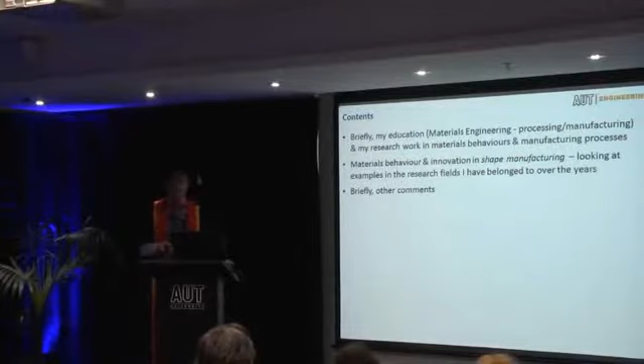This afternoon, I hope I can illustrate to you a little bit on materials behavior, its importance in manufacturing and innovations. I'll go through a little bit of my background in terms of education and research, and then go to the main topics, looking at some of the examples I've been part of over the years, and some brief comments.

But I think I should first define what we mean by innovation, at least this afternoon, since the word can mean a lot of things. It's pretty much process innovations, and it's a definition from a manual from OECD. It refers to implementation of a new or significantly improved production or delivery method. So that's what I mean by innovation this afternoon.

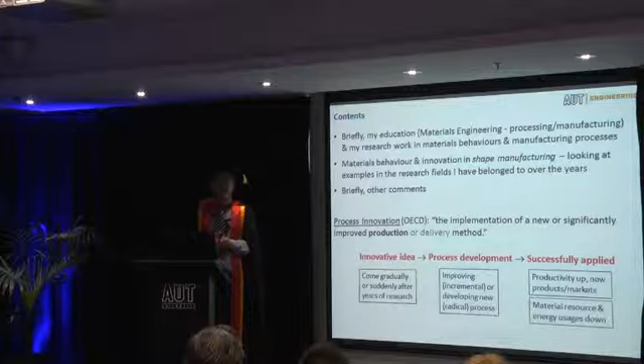Let me go a little bit into my own understanding with my background. The process of innovation is pretty much: you start with an innovative idea, a new idea. An idea can come suddenly or not suddenly, but in my case, that idea comes gradually, or suddenly after many years of research. So from the idea, you try to translate that into development of a process. That process development, according to the definition, can be incremental, but can also be radical process implementation.

Now, if it's successful, the innovation has to be successfully applied. To apply the process, of course, there are a few criteria, but today I won't be using data to describe that - it only infers productivity up, new markets, new products, but most importantly, of course, they have to result in reduced use of materials, resources, and energy, because that's quite important in terms of sustainable manufacturing and also sustainable development.

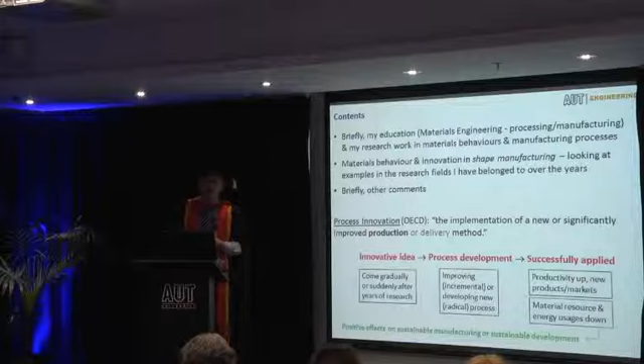All right, so I'll go back a little bit to my old days in university. I grew up in my teenage years in China, in a period that some of you may know, some may not know - it was kind of chaotic years.

And as a result of that chaos, two phenomena occurred. One is that some schools - high school, primary school - shortened, and afterwards a lot of young people were sent to the countryside, and I was one of those, sent to the countryside to be a farm laborer. But that was quite common.

With that, I'll mention a little bit - if some of you take notice of China, it's now in times of power transformation. The new group of people, for example, the 7 in the Standing Committee of the Politburo - 4 of those 7 actually got sent to the countryside in the old days. So it was quite common.

And no university - well, there was university, but you couldn't go through the normal entrance exam to get to university during those 10 years of turmoil, until 1977. The higher education entrance exams were reinstated, and we called it Gaokao. 5.7 million people took part.

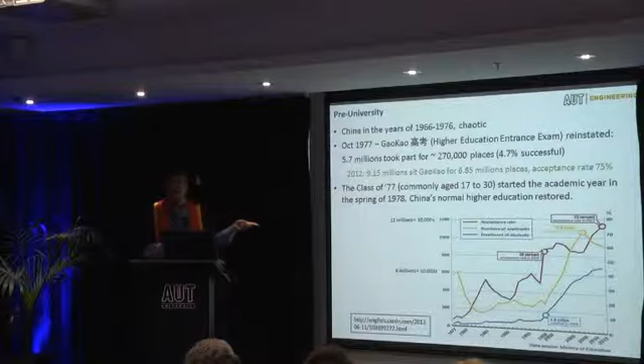About 270,000 were successful, so it's about 4.7%. The class of '77, right, they started the academic year the following year, '78, and I was one of those. Also notice, if you watch China a little bit, in the next few days there will be a new premier, and he was also one of the class of '77. So this is a historical figure in terms of the start from '77 till now, and you can notice from the red lines there that in the beginning of '77, it's a very, very low success rate in terms of taking the exams and going to university. That's how I got into university.

As the Vice Chancellor just mentioned, I did my undergraduate degree at Central South University. My first couple of years were pretty much the same as mechanical engineering - the only difference was probably a bit of chemistry and physical chemistry papers - and in the senior years, more looking at materials properties, plastic deformation processes, and associated machinery.

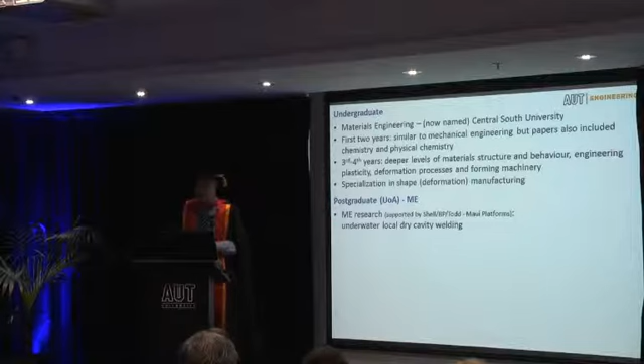So my specialization, my undergraduate, is pretty much shape manufacturing and deformations. And after that, I left China, and that's also the time I still have doubt in terms of development of China. So I left and came to New Zealand.

Later on I did my master's degree building up undergraduate underwater local dry cavity and did the welding with Dr. Gregory - I just saw Dr. Gregory come in the room. With that, it's pretty much a torch, and they figured out where the dry cavity comes from and the conditions. After that, I did the associated mechanical property and microstructure analysis and so on.

When I finished, I went on to do a PhD, and I was awarded the New Zealand Steel Research Scholarship. Then Dr. Clark, who's not here today, pointed me to a project on this particular topic.

Most of us would know that zinc on top of steel would protect the steel, but during those years there were new alloys, and what happened is the interface region is not so clear. That's what I did my study on, and it turned out that in the interface there's a lot of thermodynamics we need to figure out. That's the paper we published part of, and later this is one of those compounds that's very important in the interface.

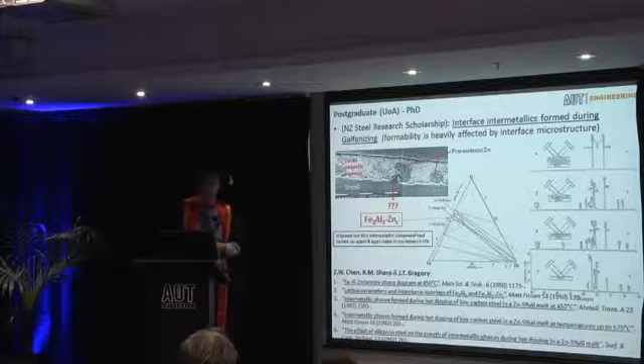With the coating, I did a serious characterization, worked out the structure and also the growth kinetics, to understand the thermodynamics and kinetics of the issues. It turned out this particular compound turned out to be very important in my career - it actually turned up a few times, as you will see later.

So when I finished, as the Vice Chancellor mentioned before, when I finished my PhD, I went to Australia. I joined a company called Pasminco, quite a big international base metal company, and we did consulting work, short-term work, as well as medium to long-term work for the company and also the international base metal communities.

One of the areas we worked in was coating alloys development, because zinc is a base metal, and we tried to work out the growth kinetics and how that affects the quality of the coatings. This is some of what we did.

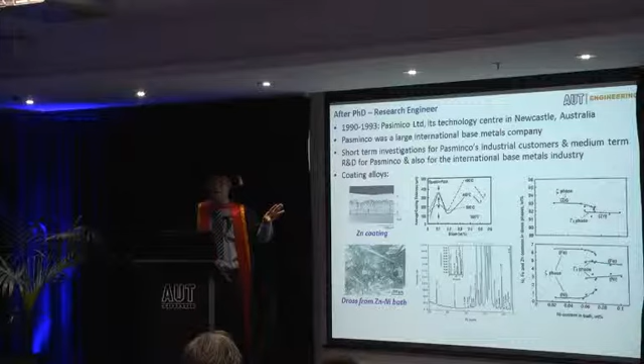But apart from doing short-term consulting and working with customers, we also did medium and long-term study, and therefore we also had the opportunity to communicate with the academic and research communities.

Also at Pasminco, that was the time - if some of you remember, about 20 years ago - there was a lot of, you go to your car and look at those batteries, and in the old days every now and then you had to put water into it. Those were the times they wanted to change that to the so-called maintenance-free battery.

With the maintenance-free lead acid battery, you need to do a lot of alloy development. I spent about 2 or 3 years on that, doing a lot of work on castabilities, precipitation hardening, joining, and corrosion resistance, and so on.

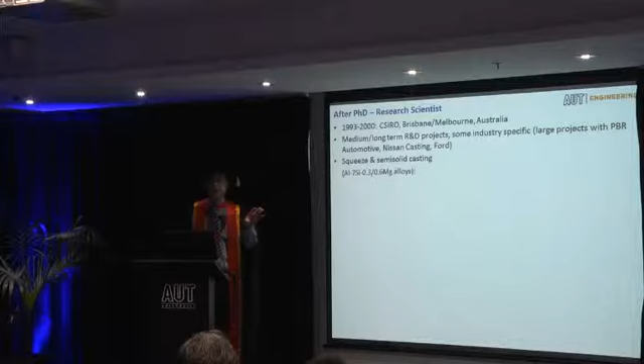I spent quite a bit of time on new processes called squeeze casting and semi-solid casting, figuring out the melt chemistry under squeeze casting conditions, as well as the conditions for making good components.

Squeeze casting and semi-solid casting in the mid-90s was an emerging manufacturing technology, and that's why CSIRO saw it as something new - they often jump into new areas and do a lot of work, and that was one part of that.

But every now and then we also need to do work with existing industry, and that's why we worked with Nissan die castings quite a bit - these are some of the components. To a lot of us, you may or may not have heard, but if you just go to your car and open up your bonnet and count, you'll find most of the components now are castings.

So it's very important for the transportation industry and car industries. One of the problems I tried to work out in those days is one that is a real headache to the industry, called die soldering. I'll illustrate that topic a bit more later on, and we tried to work it out under the conditions of die castings.

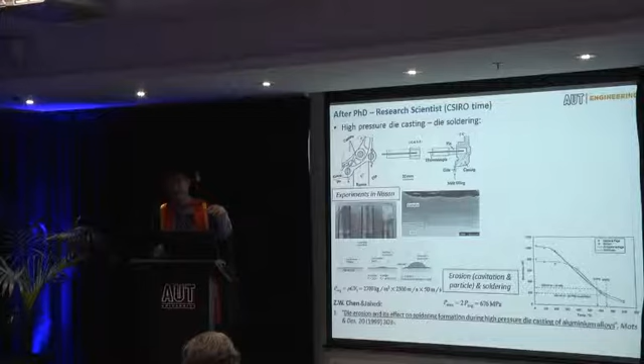First of all, what's the erosion effect on soldering, and we also consider cavitation erosion and particle erosion. Later on we look at the thermal effect, how that affects die soldering - I'll come back to what die soldering is a bit later. We also quantify a lot of the structure as well as the kinetic growth of the so-called soldering layer.

I finished at CSIRO, and I came back in the 2000s to join AUT. In the 2000s, when we first became a university - some of you may remember that - it was also a time we tried to build up research. But the facility, in a way, was quite primitive in those days.

In the first few years I continued to spend some time looking at some of the problems from when I was at CSIRO. One was looking at the thermal issue and how that relates to a certain mechanism of skin solidification. Also, again, more in-depth mechanisms studying die soldering, as I mentioned earlier.

At the same time we also opened up and tried to look for new topics, and one of the things I did was as a visiting professor, I tried to work with and look at the process of welding high nitrogen steel - stainless steel.

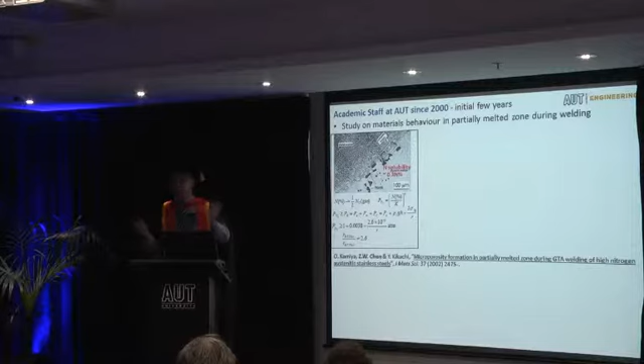The significance of that is, we all know stainless steel, but a lot of austenitic stainless steels are not very strong. For example, if you go to the kitchen, the sink and those stainless steel items - in engineering terms, the steel strength there is probably only about 250. So they're not very strong.

But in some applications you need very strong austenitic stainless steel, and one approach is to put nitrogen inside the stainless steel for hardening purposes. But when we do the welding we have a lot of problems. One of the projects we did was to try to figure out why, in a specific location, we get a lot of gassing, ending up with a very distinct pattern of porosities.

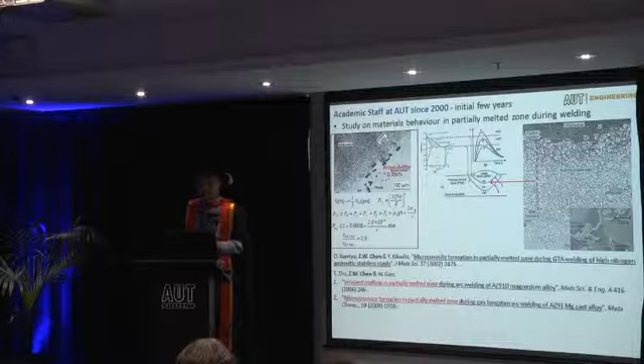At the same time, I worked with Dr. Zhu and also Professor Wei Gao from Auckland University, looking at the mechanisms of local melting and solidification. When you do the welding, here is unmelted material, here is liquid metal, with somewhere in between. So we tried to work out a lot of the incipient melting mechanisms and the microstructure formations, and later on we extended that to look at some of the phases and their dissolution kinetics.

In those initial years and over the last many years, some of you may have noticed that I've spent a lot of time doing friction stir welding and processing research. I'll give a little more detail on that later.

I'll just list some of the key publications we've done at AUT. In academic community now we quite often look at publications by impact factor - what I mean by key publications are those published in good journals. In our field of materials engineering, I think if you get to about an impact factor of 2 and upward, that's a normal, very good journal. Of course, occasionally some of the high-impact ones are not necessarily so good, but we have done quite a bit as well.

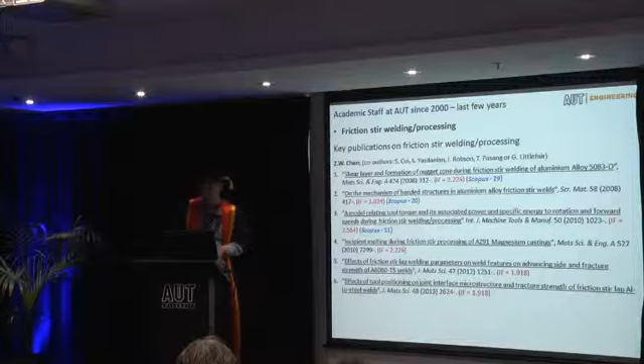Later on I worked with an engineer from Airbus and also quite a few others around the world to edit books - and the people, of course, they wrote the chapters. So this is the kind of academic science I have done after joining AUT, but at the same time, as engineers, we also worked with a number of companies over the years.

Here is the list of those industrial R&D consulting work, and also a lot of student ME work funded, probably, by Callaghan Innovation in New Zealand. So I'll give two examples here. One is the friction stir welding of thick plate, which we worked on with Buckley Systems. They use that for manufacturing the backing system for semiconductor devices, and quite often they ship their products overseas.

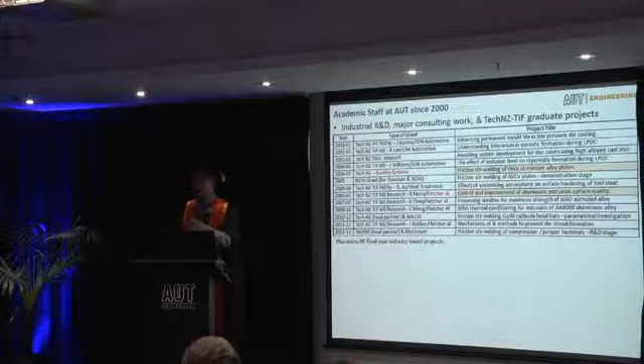The other one I want to mention is one of the ME projects by Robbie, who isn't here. He worked on fractured aluminium extrusions. This is quite significant, even though it's an ME project, because it has a lot of industrial relevance. I mention this because Robbie went to an international conference on aluminium extrusions, with a lot of industrial people there. One day I received an email, and Robbie said that after his presentation, people lined up in a long queue to talk to him. It's quite significant because a lot of industrial people want to understand more and find ways to solve those problematic issues.

Another example I like to point out is from the last few years. Daryl Wong is from Trade Enterprise and worked with us at AUT, and through that process introduced friction stir welding technology to the four patrol vessels for the New Zealand Navy.

So I just want to make the point that we engineering academics do want to conduct R&D with industries, and what we probably hope for is more supporting mechanisms to help us do industrial research in New Zealand. That's pretty much about myself, from my undergraduate years to now in terms of research.

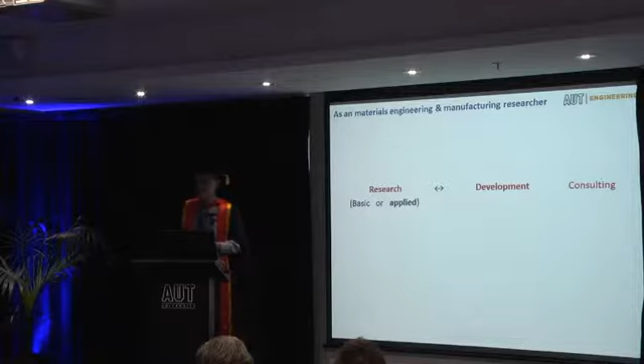I want to point out a little bit from CSIRO and also as a research academic in university. What we do is a lot of research development, and occasionally consulting work as well. I want to bring up something from when we were at CSIRO — quite often we had discussions, sometimes driven from top management, about the mix of basic and applied research and how they interrelate, and how research relates to development work. It's dangerous if you don't do basic research, because for applied research, if you don't do much research, your development work is pretty empty in terms of output from research organizations.

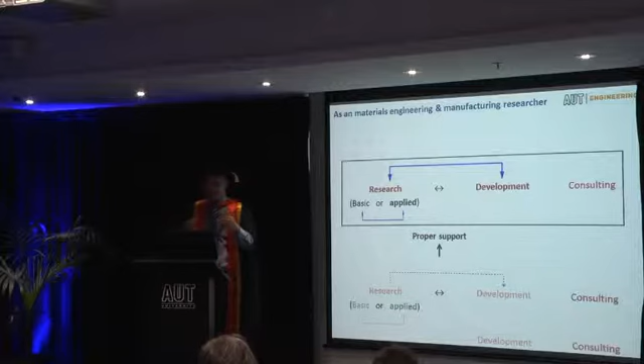So I think it's quite important that as an engineering research academic, we need to cover a whole spectrum of research, development, and also consulting. I believe proper support for this activity would have a lot of benefits in terms of research training, generating wealth, and protecting our environment.

So I'll use a few examples to illustrate the importance of materials behavior in manufacturing methods. The first one, I'll go back to look at the interface intermetallic. In this particular case, I'll look at the idea, the incremental developments, and then how they apply — those within so-called process innovations.

Let's look at zinc first. I borrowed this from the International Zinc Association. When I was at Pasminco, we did quite a bit of work and interaction with the International Zinc Research and Development Association, which is the research arm of that association, so I know a little bit about it.

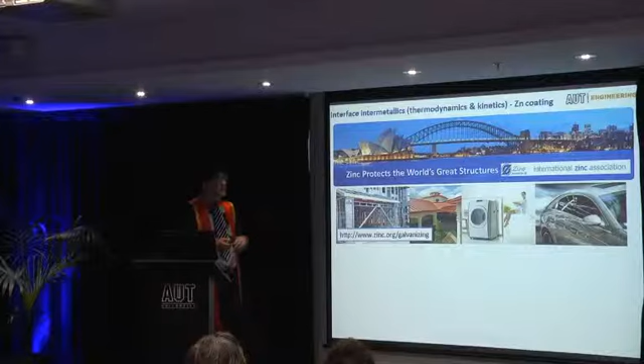This picture tells us quite a story — zinc protects a lot of beautiful structures, but also protects many other structures, from roofing in New Zealand, to white goods, cars, chemical plants, and now more popularly wind power generation. You need it there too, and if you go along the street you see a lot of power poles that are galvanized. If I look out my window, that's what I see — a lot of zinc.

So it is very, very important, right? I put in here a logo from the Galvanizing Associations - every few years, on every continent, they have conferences about zinc and how zinc protects steel. So it's quite important because it's such a big business. We don't feel it, but there is a lot of activity.

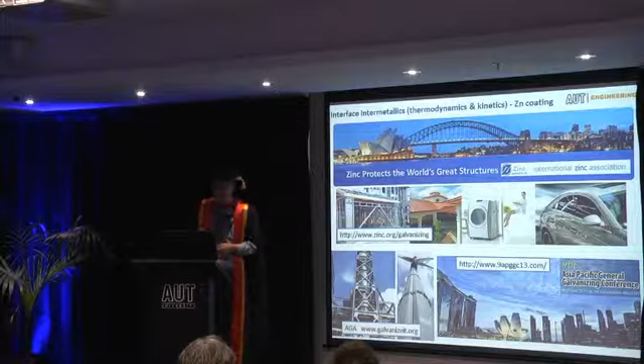So what I want to look at now is the traditional process: if you have a very good zinc coating and the operation is done properly, you have a very evenly distributed coating thickness. With that, you have what's called the intermetallic compounds. Why? Because if you dip steel or iron into zinc baths, what happens is the atoms of zinc and iron, after you clean them and reduce all the oxide, come together and diffuse in. They have interface reactions, nucleation and growth according to the phase diagrams.

Now, what is a phase diagram? A phase diagram tells us that at what temperature, at what composition, you have what phase. Well, that's what it tells us. But on the other hand, it's kind of like a graphical representation of thermodynamic data. Based on thermodynamic principles, you can actually predict that. But of course, along the way, you need a lot of verification from experimental data.

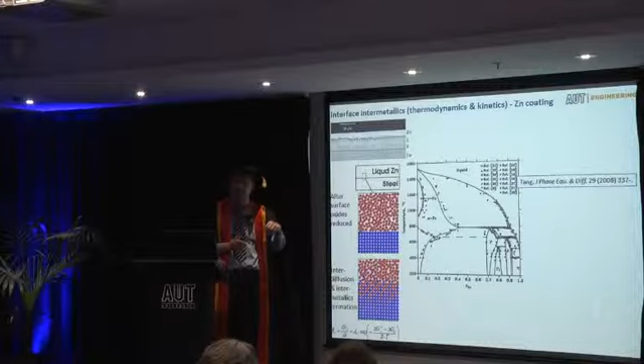All right, so what happens is, for some steel, though it protects the steel, it's not so easy to get an even coating. Why is that the case, and why is it not even? Because locally it can actually grow very thick and become very, very brittle. So it's kind of like cancer cells in there - it's very dangerous, and I'll illustrate this to you.

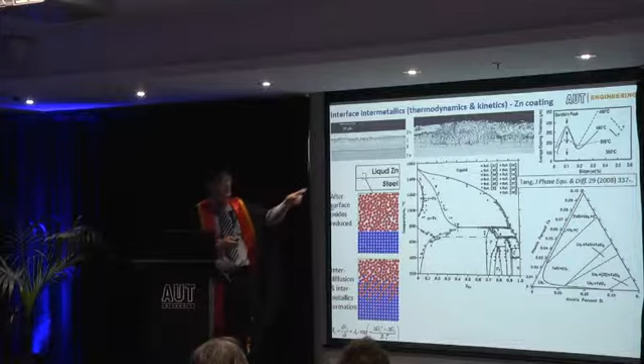As a function of growth and silicon content, you see it go up and down, depending on the temperature. The thermodynamic reason for that is because once you're making steel, a lot of steel requires getting rid of oxygen during the process. One of the common methods, of course, is using silicon. So silicon kills the steel, and afterwards what's left behind is some silicon. And when you have silicon, according to thermodynamics, you have a local kind of equilibrium - a liquid silicon and iron.

With that, you actually disrupt this kind of growth - locally you have liquid coming in. So that's why you have those things. And the danger of it - I can give you one example: only about two years ago I did consulting work, and one of the companies said, well, why is their galvanized component keep breaking off? And that is precisely because of similar kinds of reasons.

Okay, so it turns out the understanding, because of the practical importance of silicon-steel reactivity, has been almost a never-ending research topic for a lot of people because of the importance of usage. I can quantify that as a use-inspired basic research topic for the last 70 years.

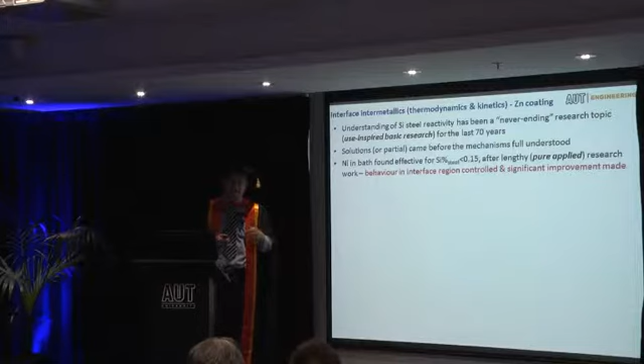Now, solutions or partial solutions actually came quite often before the mechanisms were fully understood, and nickel is one of those. After a long time of research, applied research, people figured out that if you put nickel in the melt, it can suppress those funny growths - that's one of the examples you can see. And of course, from a thermodynamic point of view, people try to explain that it looks like an inhibiting ternary layer between the so-called melt and the layer.

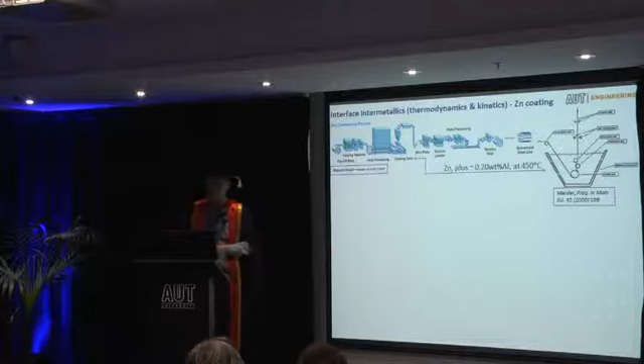This inhibiting layer is actually even more so if you look at the so-called continuous line. So this is a process where all those galvanized sheets go through the procedures very, very fast. If you look at the zinc baths, the zinc is tied up with about 0.2% aluminium. It turns out that with that 0.2% aluminium, during that short dipping time, you don't have intermetallic growth. So you end up with a very even, about 20 micron zinc coating, which is quite often reasonably deformable. So this actually turns out to be a very, very good compound in between, and that is because it inhibits the normal growth.

And I put up this one here - you look at the author, Marder, who used this diagram to explain the mechanism, why that worked.

It's only from last year, right? But actually these are the same figures I published back in 1992, so I feel quite good about that.

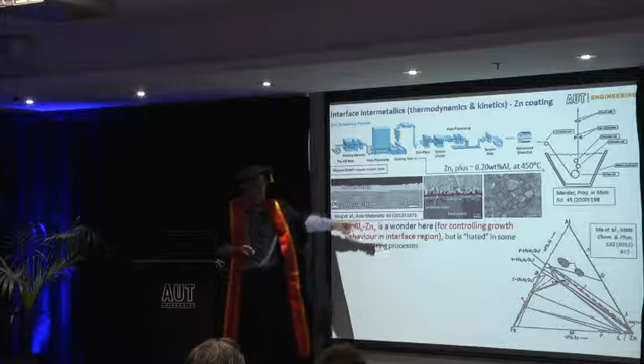So what happened is, because of that ternary system, the reaction paths go roundabout instead of a straight line—they go quite round. This is because of the formation of an aluminium-rich layer, and next to the system you have aluminium depletion. Because of that depletion, the layer grows very slowly, but thermodynamically it's stable.

So that's why during those few seconds you don't get abnormal growth. There's a lot of equations and growth kinetics that have been considered in more theoretical detail. I call this a thermodynamic and kinetic 'sweet spot' that's important for controlling material behavior during manufacturing.

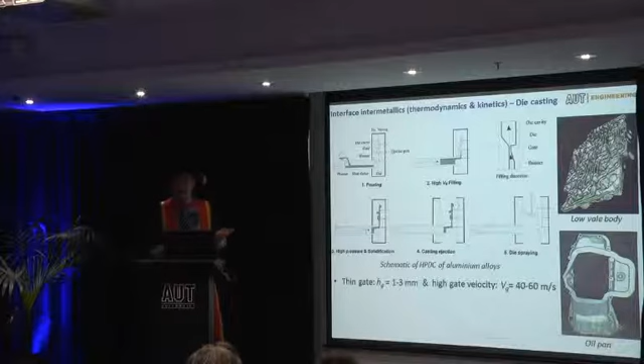Okay, I'll turn to another topic now—still with intermetallics, and I'll go back a bit to die casting. A die casting machine, as I showed you the picture before...

If you look at the machine schematically, it starts with pouring the liquid, then the piston goes forward and injects the liquid into the die. Afterwards it solidifies and the die opens. That's why you have a lot of those castings inside your cars.

But the problem is that in this process, the gate velocity is up to 40 to 60 meters per second. With that number, you have very hot aluminium impacting the die steel at high velocity. That's why die steels don't normally last too long, but they are very costly, and production downtime is even more costly—it can cost a lot of money.

One of the problems is called die soldering. It's a failure mode, and it's very costly. It's been intensively studied for decades.

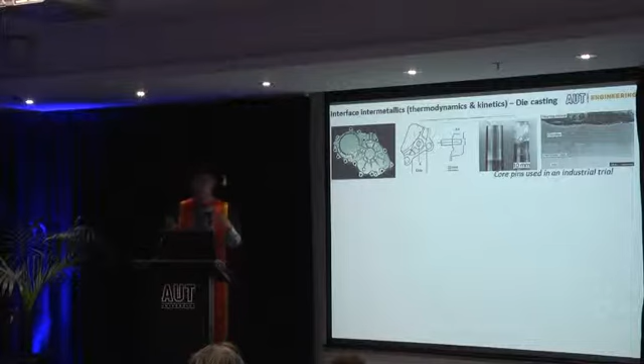What is soldering? Here's an illustration: if you have a casting, the die cavity is quite complex, so you have a lot of fingers, and liquid comes in and solidifies, and you take it out, right? But sometimes these two stick together—you don't want them to stick, but they do. That's what soldering is all about.

So it's a lot of headache for industries. In this particular case, people blame Fe2Al5—that's the compound I mentioned before. It's widely blamed because people don't want the joining, and it's a big problem in industry. There's a lot of speculation about how it happens.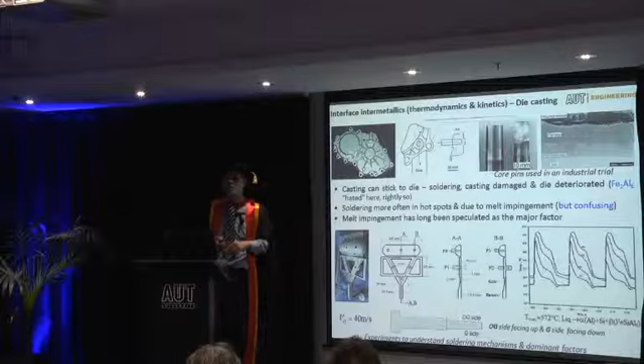But it's quite confusing—the so-called impingement of liquid, or the so-called hotspot, is considered a main factor. At CSIRO in the 90s, we did quite a bit of work trying to pinpoint exactly what's important, which is why I mentioned erosion, thermal effects, and so on.

We did a lot of work and figured out it actually turns out to be the solidification time of the material at high temperatures—that's the most important factor. The soldering process is metallurgical, but it starts with mechanical effects. So that's a very important issue: mechanical before metallurgical.

We published quite a bit of work trying to illustrate the mechanism of the whole process. However, even though we thought this was understood, I looked at a nice modeling paper published just 3 years ago in a journal where they modeled the diffusion process of the growth, but forgot about the mechanical process and forgot about nucleation and growth.

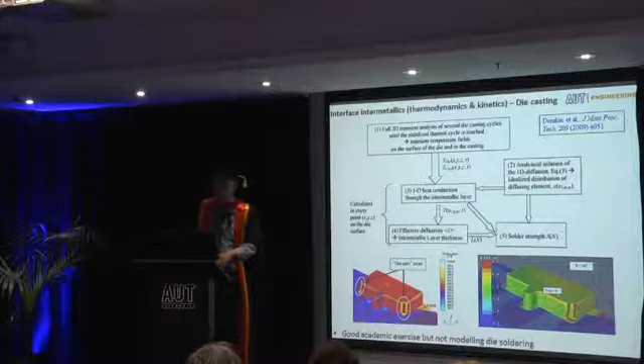So it turns out to be very nice academic work, but essentially it doesn't solve the modeling of soldering. That doesn't mean it has no value—later on, somebody might pick this up and find it very interesting, inspiring other work as well. But it does not necessarily model soldering.

You can actually see that even the books and guidelines published by industry associations base a lot of their understanding on so-called aluminizing hot-dipping, forgetting a lot about the dynamic conditions during die casting. You can look at a lot of detail—it's a bit like that.

I also have this book published by Professor John Moore—some of us would remember John Moore—and that was from when I was a PhD student.

He was the head of the department. I was doing a PhD. He later went back to the U.S., and I found out that he was the head of a department in Colorado School of Mines.

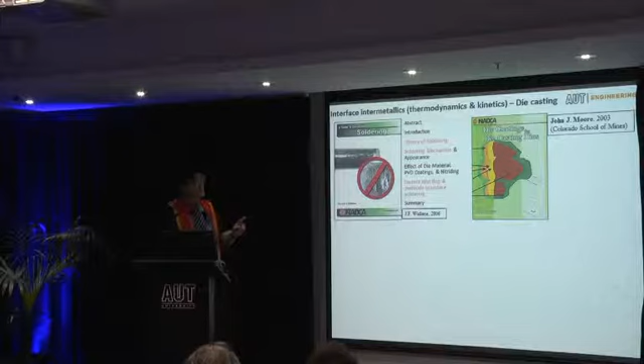Over there they also have a center of surface engineering, and he's a director. That group has done a lot of work on coating, and one of those is specifically for prevention of soldering. It's quite interesting though - if you look at those graphs, they've done a lot of coating work, but they borrow somebody else's graph looking at pretty much dipping mechanisms, and it's totally forgotten the dynamic of die castings.

So of course die soldering as a sequence is very different. I'll illustrate a little bit of a coated and uncoated difference, but to cut the story short, that severe die soldering sequence is mechanical and then metallurgical. The latter is an aluminizing reaction in solid state, not hot dipping. It's difficult to be understood in industry, so control is difficult, costly problems persist, again and again - after a few years there were big studies again on this.

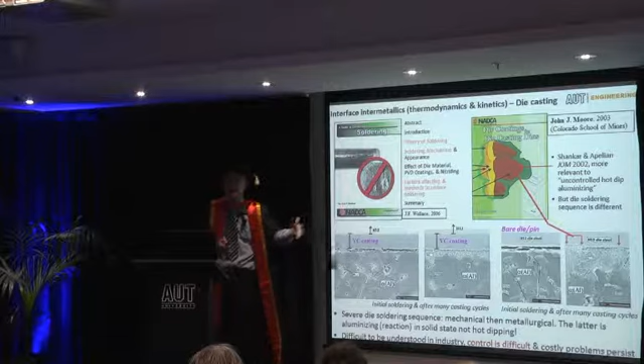All right, so I'll turn, still in the topic of intermetallics, to the use of that topic as it relates to welding.

Welding - well, we all know, probably most of us know welding, particularly engineers - but it's actually turned out to be very difficult to weld if you have aluminum. The melting point is somewhere around, depends on the alloy, about 600 let's say. And then if you have steel or titanium and even copper, you have above 1,000. It's very different in the melting point, and it creates a lot of problems if you want to fusion weld them together.

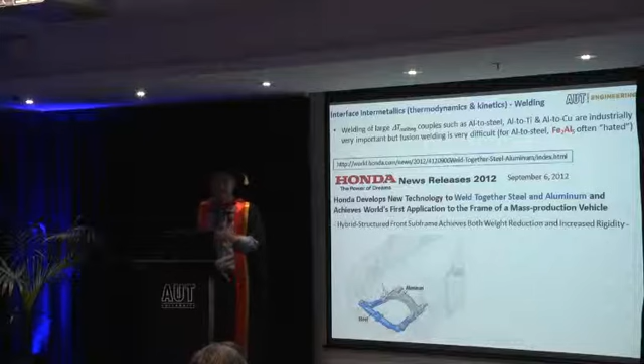I don't want to go into detail why it's a lot of problem, but I can illustrate by this piece of news from Honda, that only last year developed a new technology to weld together steel and aluminum, and now they're in a lot of productions. And with that, they actually use friction stir.

So let's look at friction stir - we did quite a bit of work on this, looking at aluminum and iron, and looking at the interface by positioning the tool in different locations, very well controlled. So we look at the interface development as well as the associated response in terms of property.

You can see that somewhere, if you control well and just touch it, you actually end up with a very high strength weld. And in this particular case, I can illustrate that if you pull it - this is so-called tensile testing - you see the difference between that particular weld and the others.

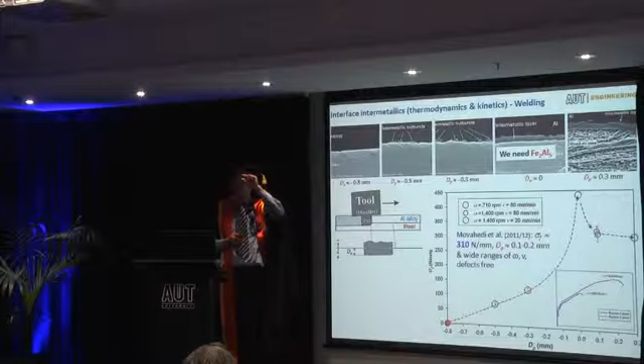In this particular case, what we actually say is we need that compound in the interface, but have to well control it as a continuous layer - not more and no less.

And we published this paper - sorry, only early this year. One of the reviewers actually, in additional comments, says that optimum tool control has been identified, which remains to be demonstrated in practice as industrially feasible, based on the tolerance of this positioning. So it's quite relevant, even though these are additional comments - it's nothing to do with whether we can publish it or not, it's just a discussion, but it is very relevant.

So with that, I'll conclude this particular topic. In terms of intermetallics, referring to galvanizing, the behavior is quite complex, not fully understood, but controllable. That's very important, and the process improvement you can make if you can control the behavior - sometimes you don't understand it very well.

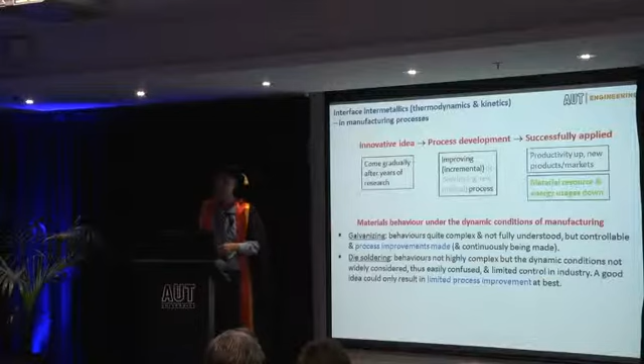But die soldering, on the other hand, is not necessarily so complicated, but people keep ignoring the dynamics of the situation. So therefore there's limited success - the problem will always keep going, and we have and have. So even if you have a good idea, it's still very hard to translate to industry in this particular case.

Welding, right, that's one of those examples. I've mentioned the behaviors now understood, and the process improvement should be made. Even new processes can be developed, but it remains to be seen, just for the iron to aluminium.

I'll change the topic now to look at the semi-solid forming process and look at this process again from the so-called innovative idea - the innovative idea, the process development and the usage of it. So let's look at the traditional die casting first.

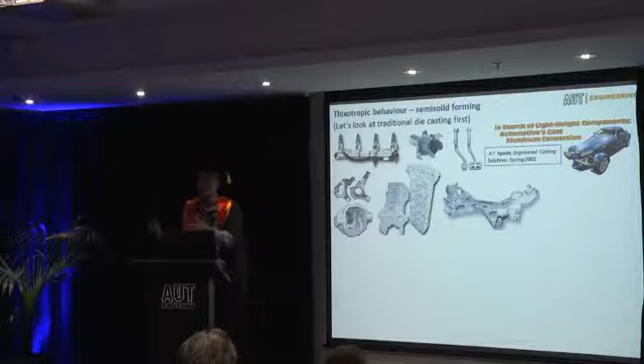A few years back, in America, the Society of Foundry put out a paper looking at the trend over the last few years of changing traditional iron castings or components to aluminum castings. The reason for that, of course, is because if you analyze energy usage and transportation, it's about 28%.

A lot of that transportation uses trucks, cars, and so on. The data suggests that if you have a 10% reduction in weight in a car, you get 6 to 8% improvement in fuel economy, and an 8% reduction in CO2. So that's the reason you want a car to be lighter and lighter.

That's probably one of the reasons a lot of my research has been driven to this - I have done that work. So let's look a little bit at the die casting cycle: die casting liquid, and then finally you have a component.

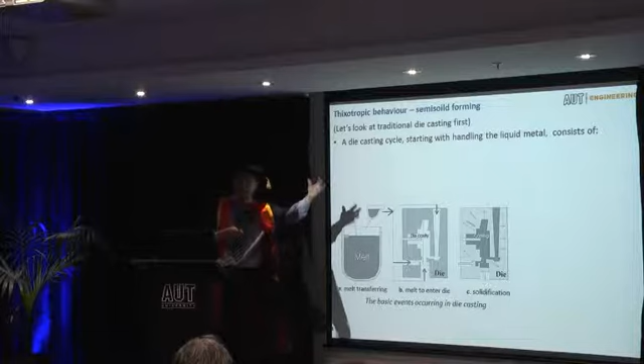It starts with transferring melt from a furnace to the die, and then you fill the die, and afterwards you have feed flow, and then you have solidification. Afterwards you open the die and take out the casting, and start another cycle.

But if you're not careful, you look at your casting inside and end up with a lot of porosity. In fact, if you get a casting component in your car and cut it open, you'd see - how come my car is like this? It's true, I can bet you'll find a lot of porosity, bigger or smaller. So the question is what causes this.

Solidification-associated phenomena in manufacturing often need particular attention, and this is one of the reasons why.

So back some 15 years ago, I was doing research on squeeze casting and then semi-solid casting. That was the emerging technology, trying to get rid of all those defects in castings.

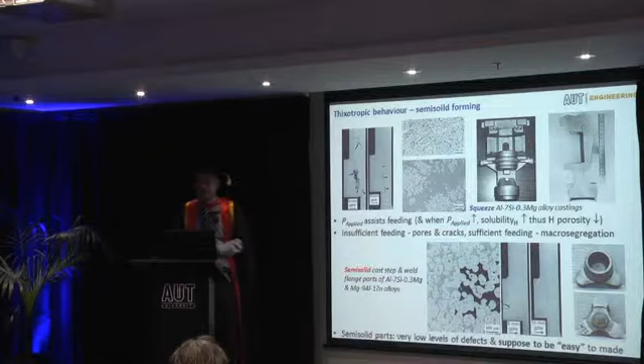If you look at semi-solid casting along the way, you see very little defect. But also for a long time, people said it's very easy to make. Why is it so easy to make?

Because if you have a semi-solid, if well-treated alloys are heated to a certain temperature, what they get is kind of like soft butter. This was 16 or 17 years ago when I was at CSIRO, and that's what we did - we heated it up, and you could actually use a knife and just cut it in half, so you can feel how easy it is. So to have a forming process with that kind of material is very good.

It's very good from a manufacturing point of view. And that's what we did.

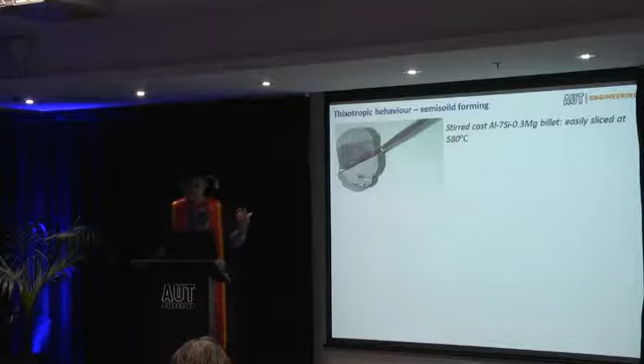This is the process of getting that semi-solid kind of morphology in terms of grains. However, you can see it has to be very well controlled here - the tolerance of the temperature is only about 2 or 3 degrees.

So what happens if you treat it well? The solid spherical particles in the semi-solid state become highly fluid - it behaves like butter. This behavior was actually discovered by a PhD student at MIT in the 70s.

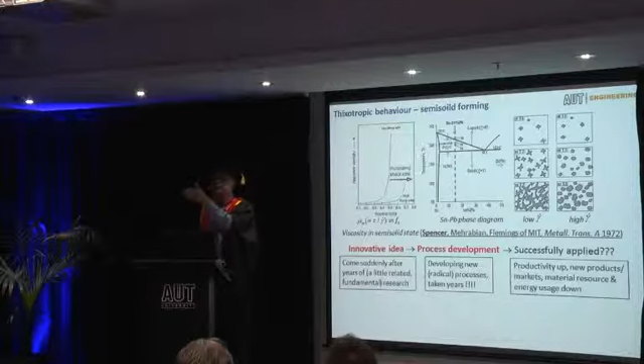He was doing experiments looking at the behavior during solidification in the semi-solid state. He stirred the material and found that if you keep stirring at high speed, the apparent viscosity drops, and the so-called solid skeleton point moves to a much higher solid fraction. That's the basis for this particular process, and they realized the significance of it to industry.

So they patented it, and that's when the process started. So, a good idea - they developed the process. Now, for many years, has it been successful?

As I mentioned before, it's very difficult to control the temperature, that's one thing, and the morphology is another. So it's not so easy, and what happened is how easily it can be deformed - it turned out to be very, very easy.

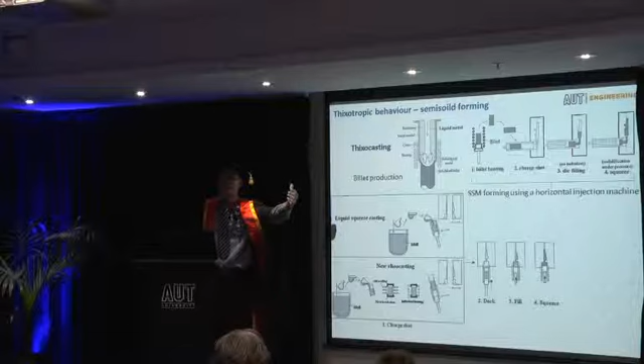So this is the process - you use semi-solid material, put it in the machine, and afterwards you have a component. The problem is controlling those materials, and one issue is the very small temperature tolerance. If some people in the group are smart, they can make good components with high mechanical properties, but it's not so easy.

I demonstrate this with one of the experiments we did when I was in CSIRO, just by varying the velocity. You can see if you have a slightly high velocity, you get jetting. Low velocity, you can't fill the die. It's not like liquid - liquid has a reasonable tolerance in a way, but semi-solid does not.

If we go back and look at why we have that particular condition, we can borrow a formula developed by Professor Niyama - he's very famous for developing a lot of solidification theories. Using that, you can predict the solidification layer as a function of solidification time, and predict that at about 1 millimeter thickness, it's about the gate choke, so therefore it can't flow anymore.

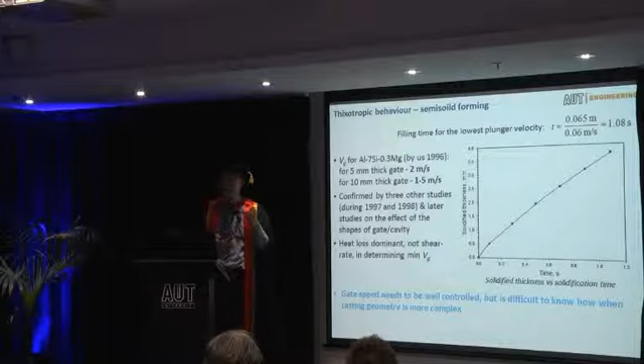So the gate speed needs to be very well controlled, but it's difficult to know how, especially when the casting geometry becomes more complex. So in reality, in industry, it's not so easy - only very smart people can do so, meaning you need a very educated workforce.

It's interesting though - if I quote Dr. Kapranos, who's been doing this research at Sheffield University for probably the last 30 years, and still does a little. In a book he published or edited, in 2008 he gave a keynote speech titled 'Semi-Solid Metal Casting, a Process Looking for a Market.' After that many years, I think the title pretty much tells it all.

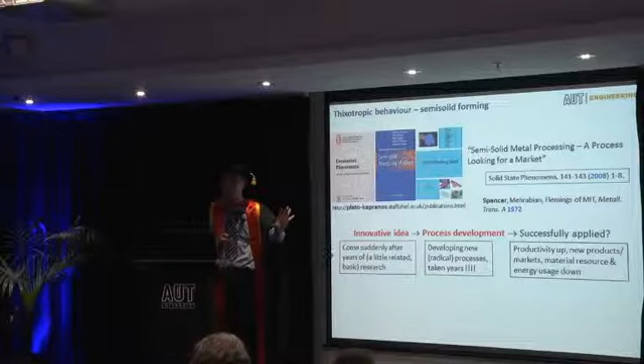So let's go back to the innovation process. You have a good idea, you can develop the process, but what's important is whether, out there in manufacturing, you can actually control it. If you don't, a good idea becomes a good process, but you can't use it. It is a fantastic process from my point of view, but whether out there you can actually use it is another question.

The last one is friction stir welding and processing, which is probably closer to my heart in the last few years. Let's look at that process again.

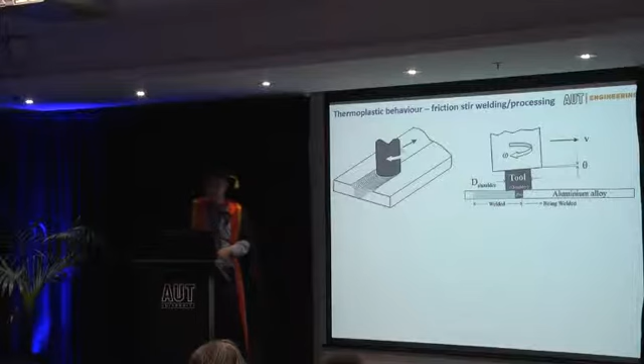Friction stir welding is pretty much very easy. If you join two pieces together, what you need to do is plunge something like a pin with a shoulder, like a drilling tool. You put it in there, rotate it, move it forward, and that's how it looks - that's what we do in our workshop. Nothing fantastic. Afterwards, the two pieces are joined very nicely together.

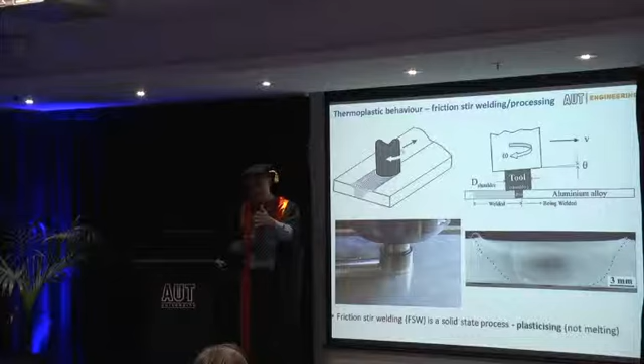This process is a solid state joining process, so no liquid is involved. Remember I said before, when you deal with solidification, there are a lot of problems. Because of that - and most of us know this - if you go onto an airplane, doesn't matter which plane, as you go in through the door, I often look at how many rivets you can see. In aircraft, you can't use welding, because once you weld... well, it's not exactly true, some smart people probably can, but because you involve liquid and come back to solid, in between you generate a lot of defects, and aircraft certainly don't want defects.

This is a solid state process - you don't have those solidification-associated problems. And with that, the engineering restrictions on using this are quite low.

This is a demonstration - again, it's Robbie, who's not here now, from when he was a final year student. He tested the temperature and found it's very close to the melting point, but below it - basically a solid state process. Because of that, all the so-called 7,000 and 2,000 series alloys that you see on aircraft are all weldable using this process.

This shows some of those illustrations or cross sections I put in there—if you don't carefully control it, you can actually generate voids. But as I'll illustrate later on, the process is actually really accommodating, and it can weld very thick in one pass.

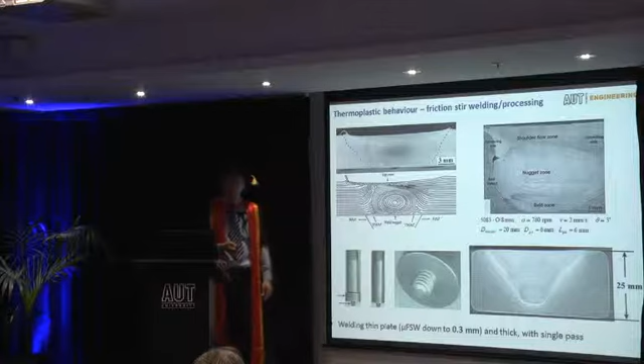In the old days, or even now, if you do fusion welding, you have many passes depending on your machine. It can come down to 0.3 of a millimeter—the so-called micro friction stir welding—now finding its way into the electronic industry. This is some of the tools we use.

Okay, so let's look at a little bit of the basic principles. We know the principle and how it was discovered—it was discovered by a gentleman called Wayne Thomas in '91.

Traditional fusion welding solidification has relative defects, a lot of problems, but we have to use it—we have to weld, we have to join things together to make structures. Laser welding, high energy beams, reduce the degree of solidification-related defects. Friction solid state welding eliminates this, but in the old days friction welding could only do linear or rotational motion, not much else.

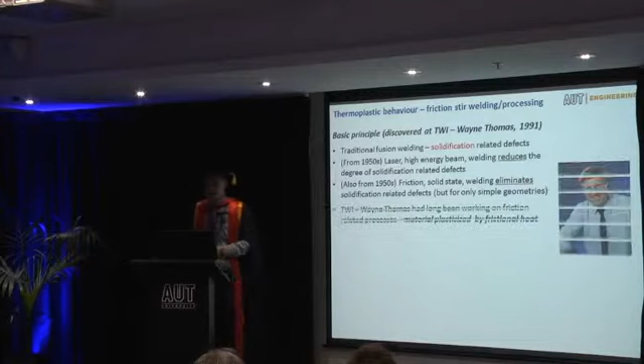But friction stir welding is different. This is Wayne Thomas, and I've been quite fortunate in the last few years to have various associations with him—he was here two years ago, traveling around New Zealand and giving good presentations.

Thomas was, in the old days, a tool maker to start with. He later worked his way and did an ME, so he gained a lot of knowledge as well. He worked on a lot of friction-related processes, but in his mind he kept thinking, in a very simple motion, how can I use plasticized materials and somehow transfer them with a good mechanism for the purpose of welding?

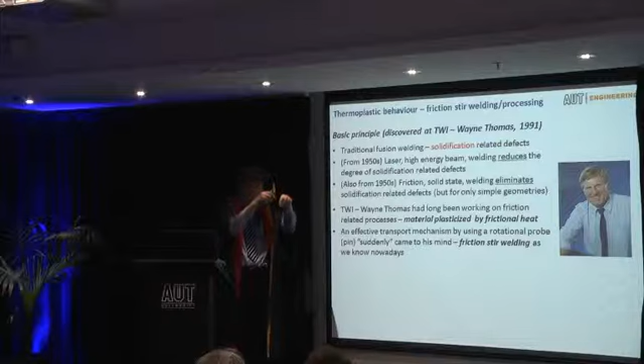That idea was in his mind for a long time. Actually, the story of that discovery has never really been written down. So when I wrote the introduction of that book, I communicated with Wayne Thomas, and he told me that after it had been in his mind for a long time, one morning it all just clicked. That's how he started using a pole and a pin with a rotating probe plunged down—you rotate, plunge in, and transfer the material around, and afterward you can make a good weld. That's what we now know as friction stir welding.

Okay, good idea—process development. But is it successful? Only when they applied process innovations has it been successful. So let's look at some examples of friction stir welding that I've probably presented quite a number of times. It's very easy—if you go online, you can see these examples.

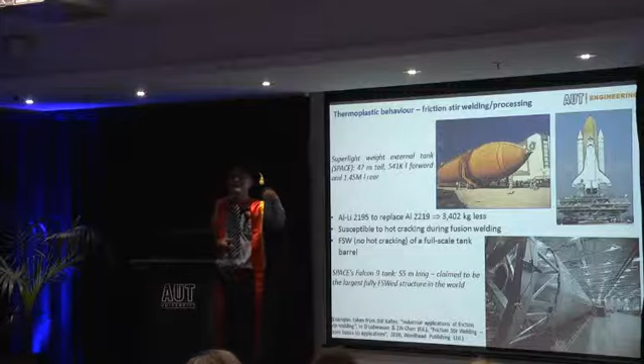The very famous example is the fuel tanks in the space shuttles. That, of course, is aluminium—the space tank carries the fuel, and you want it as light as possible. So one approach is aluminium-lithium alloys: you put a little bit of lithium into it and increase the strength quite substantially, so you can reduce a lot of weight. Very beneficial, but you can't weld it very well using fusion welding. That's one of the early examples where people used friction stir welding and successfully welded those tanks—this is one of the longest structural friction stir welds for that kind of application.

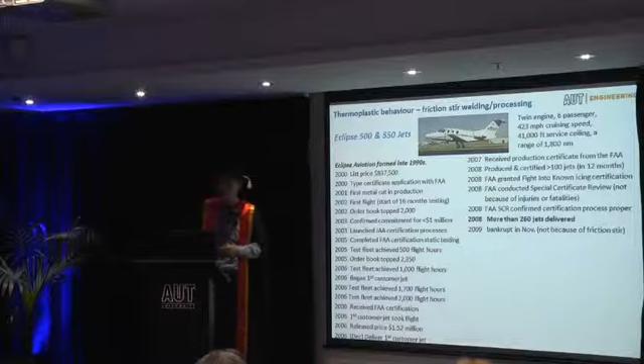A smaller example is the Eclipse, a 6 or 7 seat small plane. In the late 1990s, they formed a company and designed a whole manufacturing system with friction stir welding in mind from the start. To cut down the history: by 2008, 260 jets had been delivered, but in 2009 the company went bankrupt—though that had nothing to do with friction stir welding. By 2011 they started taking orders again and went back into production. This sequence shows some of the friction stir developments inside that company.

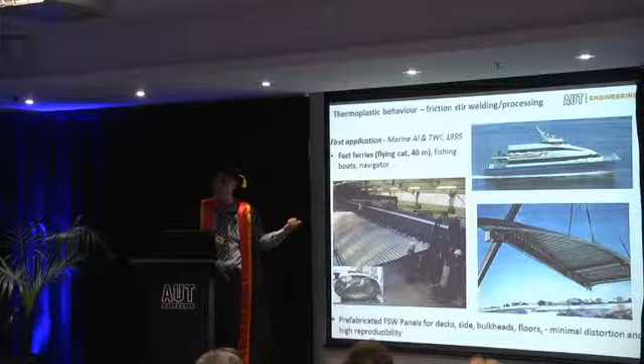So aerospace, trains, but actually the first application of friction stir is for marine. Here are some examples: in the beginning, a fishing boat, a superliner, and in New Zealand, as I mentioned before, we also have the success of 4 naval vessels built using friction stir panel manufacturing.

By the mid-2000s, 2004 and 2005, the academic community started to feel that the application of that technology had been a success in idea, development, and application. But among the academic community, we feel that the application of these technologies is well ahead of understanding the friction stir science. So in various conferences, people called for a deeper understanding of the physics of what's happening.

One example, in 2009, was a call for a mapping of the process measurables and the resulting microstructure and properties. But of course, at AUT, we also wanted to know: you map that, but what's happening in between?

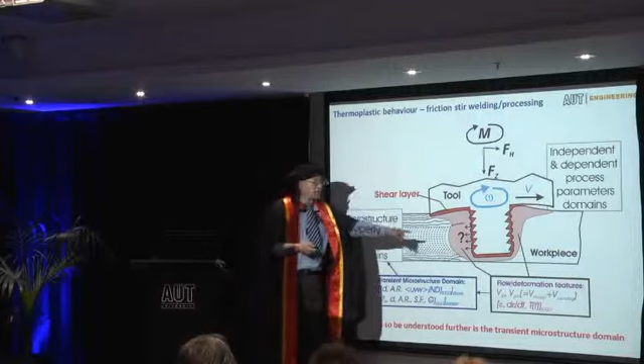That's some of the work by Song, who is not here, Wei Gao, and myself as supervisor of the PhD student. Song spent a few years trying to figure out what's happening inside during friction stir, and he completed his PhD the year before.

To illustrate a little bit, over many years a very large amount of research has been done in this area, with major reviews taking place, as well as special issues of journals with many papers devoted to the subject of friction stir. I'll try to illustrate one of the importances: even the strain and strain rate during deformation—what are they?

I think to this day it's still quite uncertain. So I'll just give one example.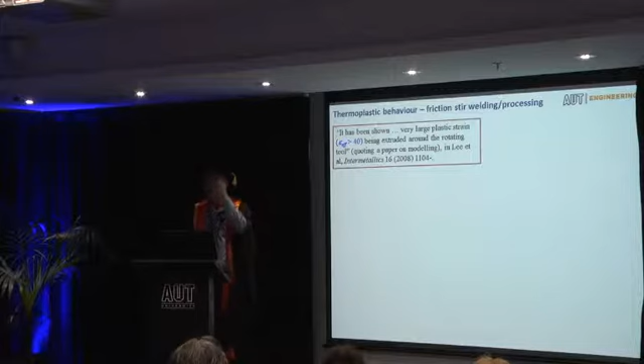Some years ago, according to some modeling, people said the true strain, the effective strain, can be higher than 40. Just imagine—higher than 40 means if you pull that, it's almost forever. It's physically impossible.

So this is more down to earth—a very simple calculation. When you do friction stir, you come around there, you stretch, and then you compress again—that's what the number is. Of course, this is to do with a lot of modelers, and that's what they do. When you do the modeling, you come up with the streamline, and then you follow that and try to look for the strain and temperature.

This is a flow, but it can also be thermal. But the problem up to now is that a lot of modeling work has completely ignored—because you have a tool, a pin, actually a threaded one—the space inside the thread, which has been completely ignored because it's difficult to understand the physics behind that. So nobody has really modeled that much.

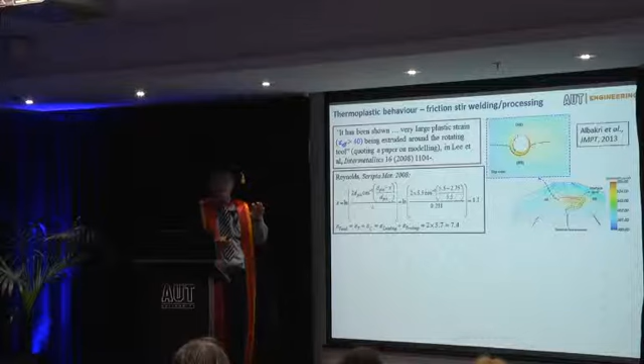I think we're starting to see people now attempting to do that, but this is the kind of calculation involved. In terms of strain rate, a few years back you could see results all over the place, so it's difficult to understand.

What we have done is a very careful experiment to try to capture, during friction stir, what freezes the material, and according to the material, try to look at the deformation. Knowing the velocity, we try to work out the strain and strain rate. That's what we actually figured out here, but back inside the stir zone, we still don't have much idea.

At the same time, Song also did a little bit of work on what's inside there—looking at the so-called microstructure, because you can't measure them directly once deformation happens; everything becomes so mixed up. But you can use a technique to chase and look—if you have deformation, the grains would flow in a certain direction, and afterwards you can actually work it out from that.

Now we have the SEM EBSD—that's what we can do, to work out the deformation, look at it, and it gives you a certain pattern—pole figures—and that's why it's quite important.

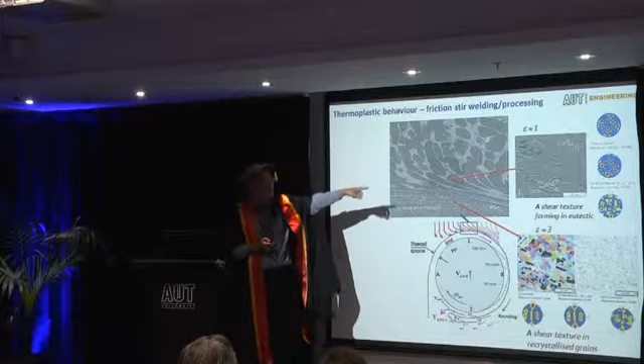He actually tried to look around it, and you look up from the starting so-called cubic texture to start to see a little bit of shear texture, and then more shear texture, and end up, you can see the pattern. Inside the thread space, it's pretty much like that.

So what we come up with, we say, well, let's forget about the details. If it's random, you get everywhere. The pattern means there's a certain deformation direction. With that, it means if it persists going around, there's not very much deformation that has taken place.

Well, that's what we thought. We're still doing a lot of things to verify that. So we'll see that what we found before probably still remains true. The strain is about under 4 and the strain rate is under hundreds.

I want to illustrate to you the fact that friction stir science is actually quite complex, quite complicated. Much has been understood, but many phenomena are still to be studied and revealed. But friction stir welding, for some applications, you don't need that science.

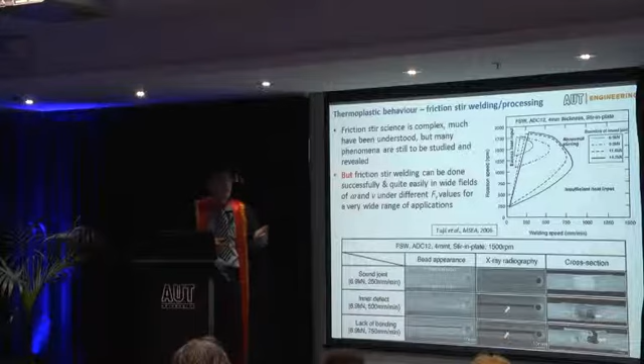It can be done successfully and quite easily in a quite wide field of conditions. This is an illustration. If you look carefully, it's a very wide field of conditions you can use for normal friction stir welding. That's the reason why it's easy to control, even though you don't understand the details. So that's why the application is so vast.

But I just want to point out, for some applications you've got to know a lot more, and this is one of those, the so-called hooking. If you're not careful, when you do the lap welding, you end up with some hook there. By the time you subject the structure to loading, you end up with a huge stress concentration and it's very easy to crack. So this is some of those.

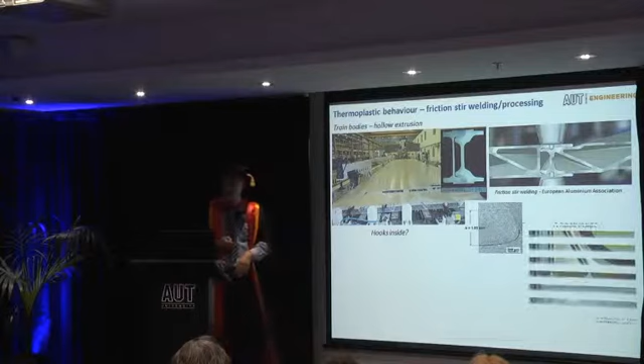We also have done some study, and I presented that a few months back when I was in Beijing. And back to Beijing, let's look again at the application in China. As I mentioned before, it's very vast, large scale application, and pretty much a lot of that, of course, is lap joining, and it's really important though.

After the conference, after the talk, one of the chief engineers and one of the senior engineers came to talk to me and discuss this topic. He said, now in the train body manufacturing, sometimes when they have that kind of problem, their management tells them: if it's a critical loaded location, do not use friction stir. That's very disturbing, you know.

But again, that's because they don't understand the behavior. So it's still some of the science we really need to understand. Otherwise, the application can be limited in a way.

So, okay, looking at the whole process: the behavior is quite complex, not yet fully understood, but in general, the process is quite accommodating and thus controllable. So the friction stir-based process has been developed and used, but the behavior, I think we need a lot more to understand.

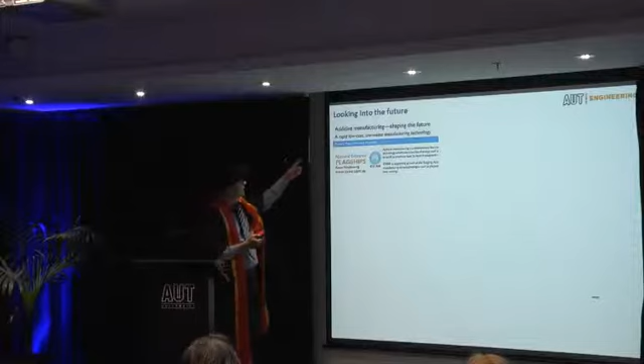Okay, so those are friction stir. Let's look briefly at the future. How do I look at the future? I borrow something from the place I used to work, CSIRO, looking at the future of additive manufacturing, shaping the futures.

Okay, let's look at the future of manufacturing. I cite some examples. It's very promising, a lot in medical field and aerospace manufacturing. If you go to a lot of conferences now in the materials field, you actually have a lot of sessions now on the subject of additive manufacturing, using high energy beams to produce those desired structures and properties for the medical field, for aerospace manufacturing.

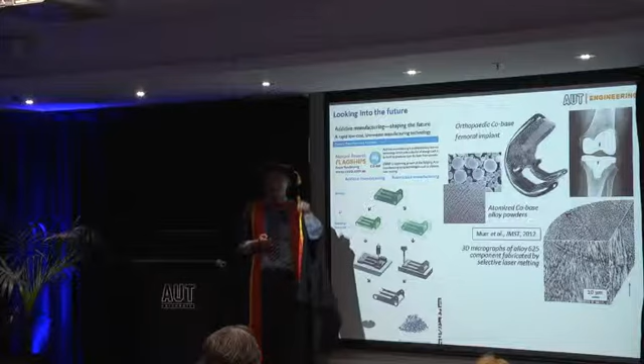So it starts with powder, of course, and it ends up with what? What do we see over there? Well, to a lot of you it probably doesn't mean very much - it is a dendritic structure. It is typical melt, liquid, and solidify, in a dendritic way. If you look at the bar over there, it's a very fine structure, meaning a very high cooling rate.

Remember, I mentioned before, solidification and associated phenomena in manufacturing often need particular attention. I think this technology also needs a lot of study before we actually apply it to a lot of fields. We need to understand that. The good news is now at AUT we are going to get these systems, and I'm sure I will do some study on some of the phenomena there, if I'm allowed.

All right, back to the future—back to the past. Let's look at one example back to the past before I finish. Let me look at this example. It's from a conference in the 90s, I can't remember, 97 or 98, at a materials conference in Australia.

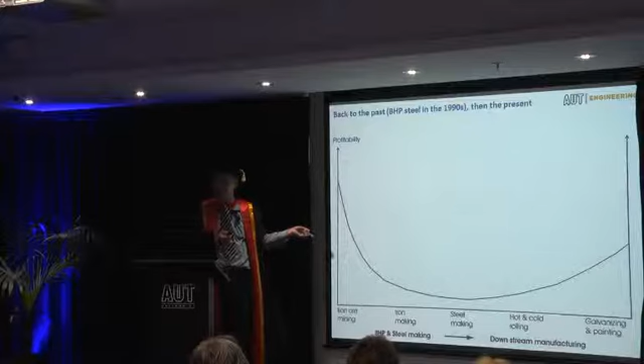A keynote speech was delivered by, I think, one of the CEOs of BHP Steel. He gave a graph—this is from my memory, that's what the graph looked like—showing profitability starting from iron mining, then iron making, steel making, rolling, and downstream manufacturing. Of course their profitability is very low. That was in the 90s.

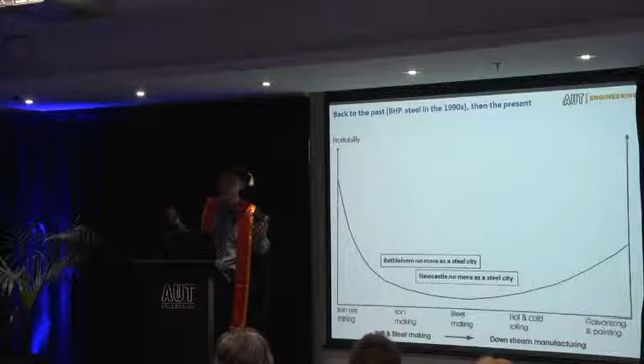And with that, of course, Newcastle, where we used to spend a few years, is no more a steel city because of that. Also, three years ago I went to Lehigh University and was shown around the city up to one of the mountains—Bethlehem Steel's lab used to produce a lot of good development work. Galvalume actually originated from that lab. But again, when we look around the city, it's no more. You see all the big structures standing there, but no production of steel anymore. So Bethlehem is no more a steel city.

I think that's quite symbolic, in a way, that in the 90s or early 2000s there was a lot of manufacturing in this region, in the US, and it starts to shrink and shrink. It's gone somewhere. I think we don't have to dispute that fact.

But let's look a little bit at the reasons. Obama's administration proposed to establish a national network of manufacturing innovation. What it does is try to address that—because of those decades of decrease in employment due to manufacturing going somewhere else, now they try to establish this.

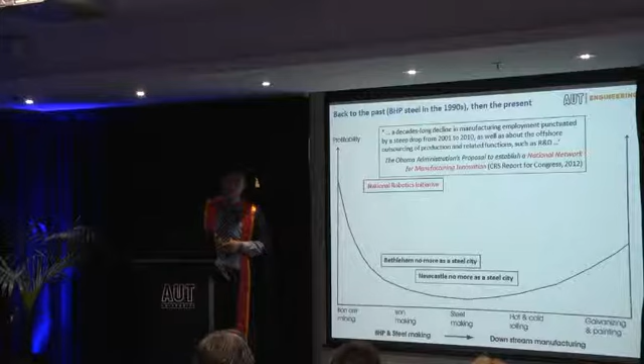With that, there are two important ingredients. The first is the National Robotics Initiative, and the other is the Materials Genome Initiative. What does it mean? There are three components: one is to develop computational tools, another is to set up a vast database available for everybody's use, and also a lot of scientists have to go back to the lab and make sure the behavior can develop a good model so you can use it for computational tools. So materials behavior is very important.

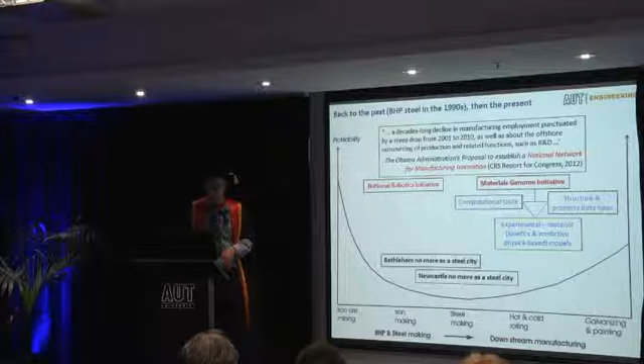Why do they do so? Because they realize you can actually invent a lot of new good materials in the laboratory, but to reach final usage you have to go through a whole manufacturing process. Without understanding that, this process normally takes 15 to 20 years. That's too long. So what I'm trying to explain to you today is that in manufacturing, at least some very important manufacturing, the prediction and control of materials behavior is very, very important.

And with that, I hope today I have also linked that behavior to manufacturing innovation. And with that, I would like to thank so many people, though I won't name them all.